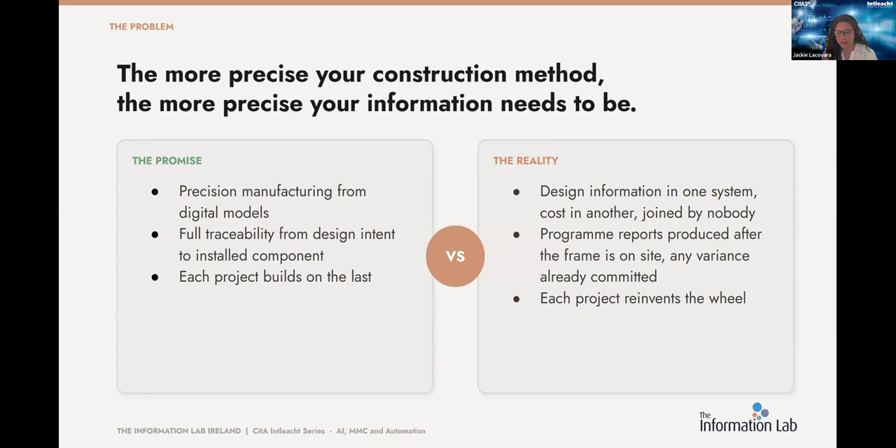AI is a multiplier, right? And that's really what I want you to take away from this slide. It takes the patterns in your data and amplifies them at speed, at scale, and with a level of confidence that can be genuinely misleading.

We've all been there. If your information is accurate and connected, the output is useful. If it isn't, and in many businesses in this industry, it isn't, well, at least not fully, you get wrong answers delivered with authority faster than any spreadsheet ever managed. And so that's really, I think, what matters for this group.

When AI informs a professional output, a cost plan, a specification, a program, the professional who acts on it also carries the accountability. Not the tool, not the platform, the person. And so the trail back to trusted information isn't a governance question, it's a liability question.

Which brings me to something that I'd like you to sit with for a moment. Really practical question, right? So, who in your organization is using AI right now and on what? We hear from senior leaders all the time that loads of folks are paying for ChatGPT themselves, or in some cases Claude, or some of the other industry leaders out there.

I mean, they're paying for it as a monthly subscription, and I get it, right? The tools are genuinely good; they're really useful. I'm not going to sit here telling people not to use AI, but at the end of the day, bid strategies, cost models, specifications going into a consumer tool with no enterprise terms, no governance, no record of what it was working from.

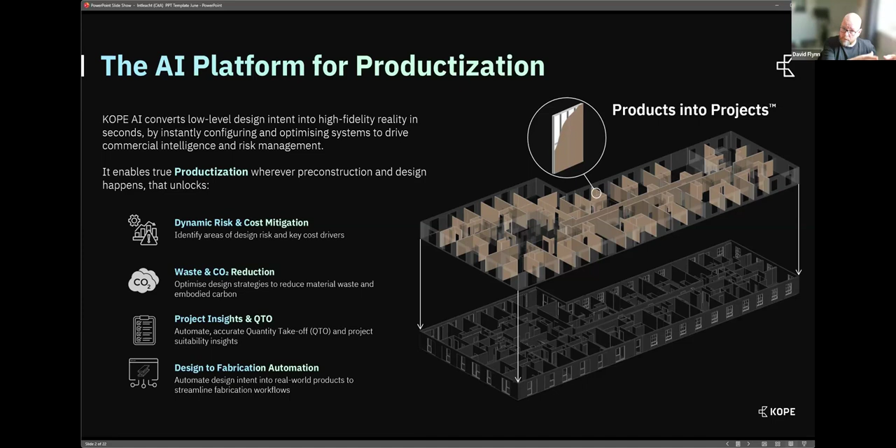So I'm not going to get into the full detail of what the platform does today, but I want to kind of give you a bit of a background on the journey from MMC focused only into AI for MMC that we've had over a few years.

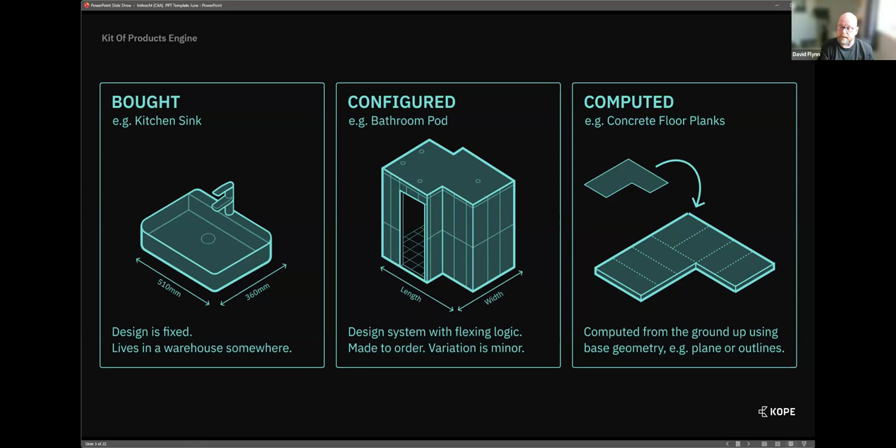So where do we start off with? Initially, when we talk about components or elements or parts or whatever language we want to use that goes into a building, we wanted to focus a bit more on the system. And we've landed on the scenario here where a lot of our customers or partners that we work alongside tend to have a huge amount of IP that goes into what their product is.

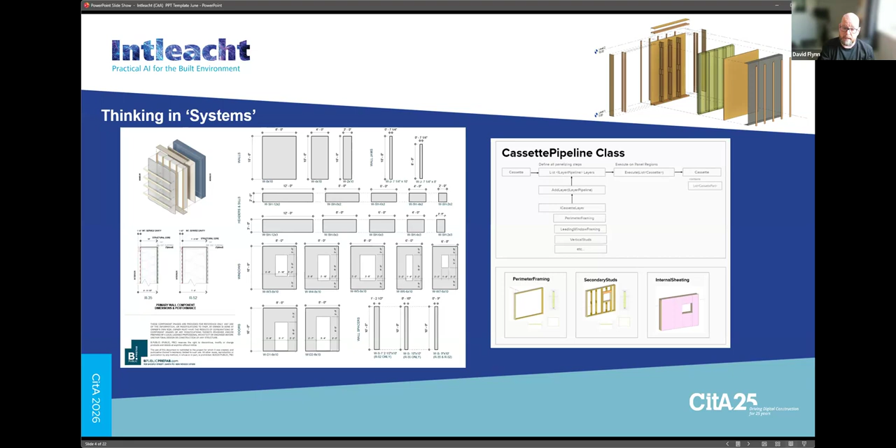Like they're manufacturers, they make a wall panel or a floor plank, and that is what they do, and they make them really effectively. But what we tried to do is to actually help them develop their catalog of products really around the idea of the context of the design. So here's some examples of some of the work that they would have provided with us, in collaboration of here's our product. And then on the right side, you can see how we're starting to think about how we would execute that in a design tool. We'll get into that in a few minutes.

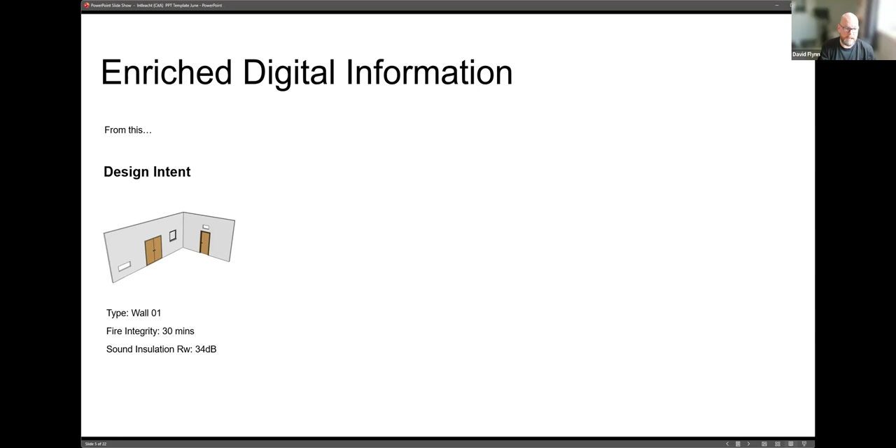So what do I actually mean? So the baseline is that we all know that design work evolves over time. We start at our early design stages, we move through into detail, and then we move into actual construction phase. And so what we try to do is to say, well, we always start with design intent. What are we trying to achieve? What's the industry trying to achieve in relation to the particular building? So you'll set out a particular spec.

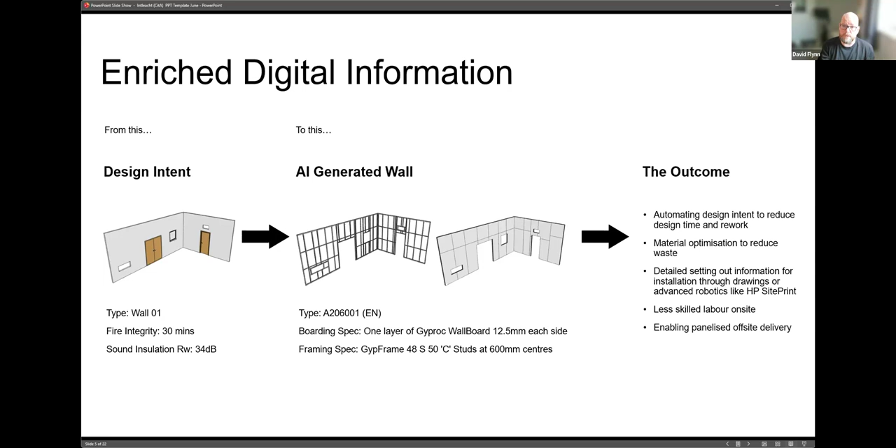And the tooling that we're now starting to evolve towards with this AI-generated approach is that we start to break it down into all of the pieces that would be required to build that element, but also then tied to the supply chain and focused around what actual boarding are we using, what actual steel framing are we using, what insulation is there, how do we open around a fire penetration, how do we open around a door, and then obviously giving us some of those outcomes, which is core to our focus in relation to being able to reduce the labor and reduce the material waste, which I'll get into in a second with an actual case study for you all today.

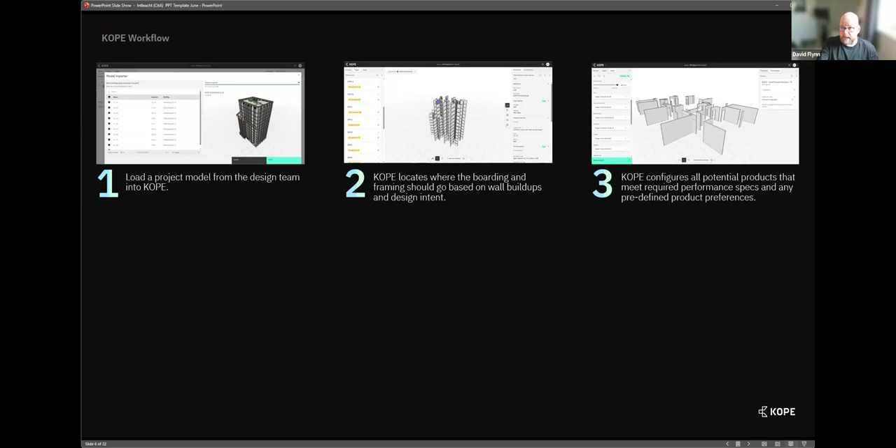So the steps that I'm showing you on screen are not really the core point today, but I just wanted to give you a feel for going from design intent, where what you'll see in the next session is really focused around being able to accelerate that with AI tools, all the way through to fabrication.

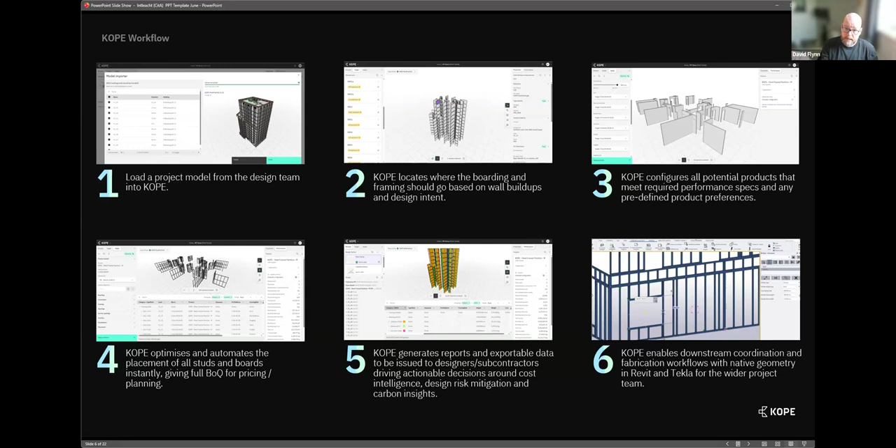And in this example, it's in Tekla for actual implementation of what's happening on the factory floor for those elements. Now, the way that this is working, and the reason we've transitioned so aggressively into the AI space, is that so much of MMC is around the rule sets inherent in a product. A piece of plasterboard is nearly always 1200 mil, they come in particular lengths and depths, and perform in a certain way. There's a really rigid set of rules that we're able to leverage and utilize.

So what I want to encourage people to think about when we move into these AI toolings is that while these tools hallucinate regularly and can make a lot of errors, the infrastructure of what you're actually providing in the first place is where you can really capture the value. It's aligned to what Jackie said earlier on. If you can understand what the product is actually supposed to do, and all the things that will go into your design, you've already solved many of your issues.

So what's on screen is just an example of us looking at simple panelization of a wall. This stuff feels very normal and natural - you put a board on a wall, you overlap the boards for fire. It's not that complicated. But what the AI tool is seeing is very fixed rules - if this, then this, then this, then this. It really allows us to do quite clever things off the back of that.

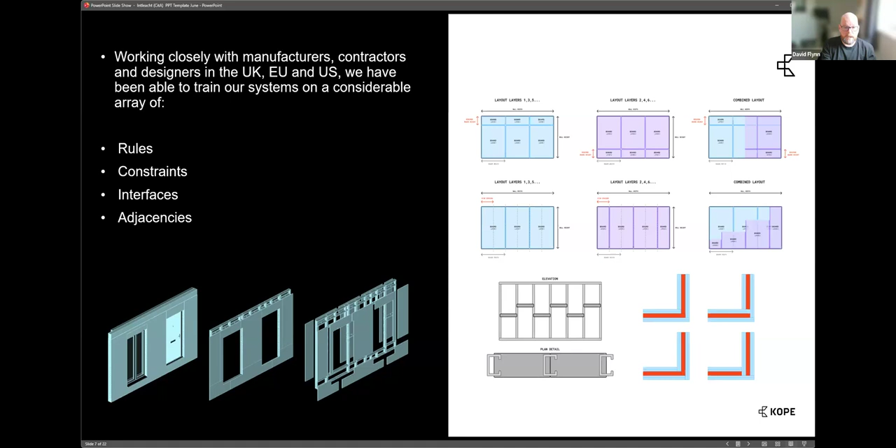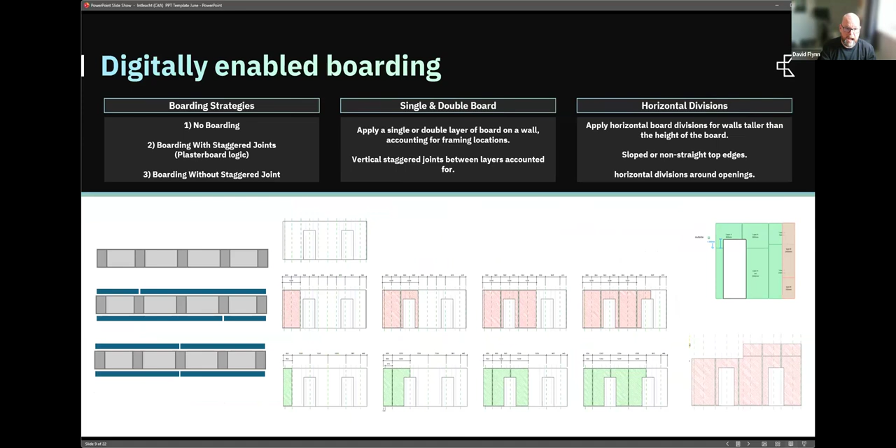So thinking about that, I've got a few slides here where we dive into a bit more detail. I won't get into this in particular, but it shows that our thinking is like, what exactly is happening in a building? What exactly is happening in relation to the transport and the installation steps? What do we need the AI to understand beyond just giving it some very generic kind of actions to follow through on?

So the core concept of what we're trying to achieve with the AI tooling that we've now brought into KOPE, and for our customers as well, is to move away from what you see on the left, which is a relatively simple design process. We are designing a floor of a home - it's got walls, doors, windows, stairs, all the usual things. But we're very much driven by the tooling that we use - Revit works in a particular way, ArchiCAD will work in a particular way.

What we're trying to achieve is actually something closer to reality that's happening on the ground. So what is actually making up that model? The example on the screen on the right is a real conversion of the one on the left, that we did for one of our very first partners - a volumetric modular company in the UK, where they wanted to break it down and actually manufacture everything themselves. They wanted to know all the OSB board, plasterboard, insulation, fixings, brackets, everything - they wanted to understand how many of them there were.

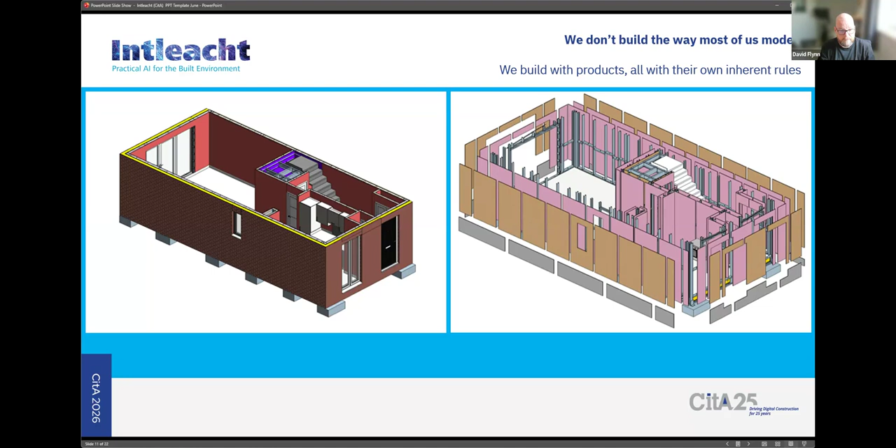So our tooling moved from the left to the right. That was long before the AI tooling came on board - things have changed aggressively, and I'll show you that near the end of this session, which is kind of exciting. This was someone clicking 20 buttons in Revit - still very fast, but it took a lot of time, and it produced a lot of information that wasn't particularly needed. I'll show you where this kind of landed as we go forward.

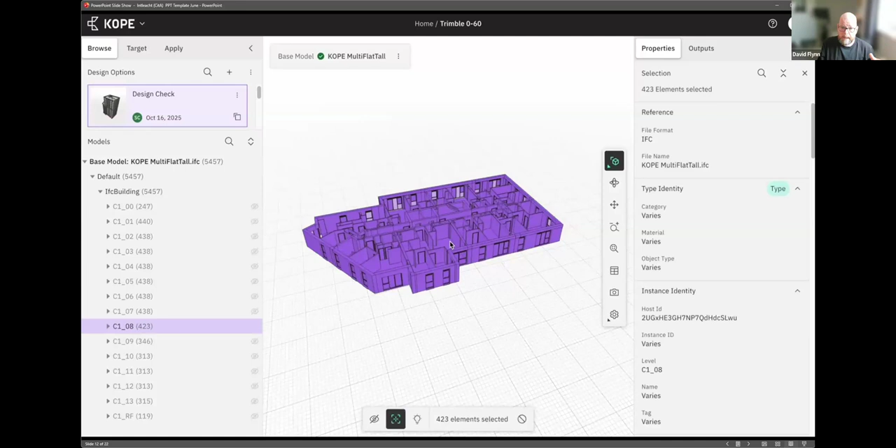So just to show you KOPE in general, this is an example of what we're trying to achieve with a standard design. You're bringing the design into the tool - here we're just going to isolate a single floor. What we're trying to focus on is what we actually need to put into this building to build it. You can see on the left we're focused on the external walls and internal partitions, and the tool's just finding the spec - it's basically saying you're an internal wall, you've got a 60-minute or 30-minute rating, you're an SFS system on the facade. And what it's done is start to create all the framing for those elements.

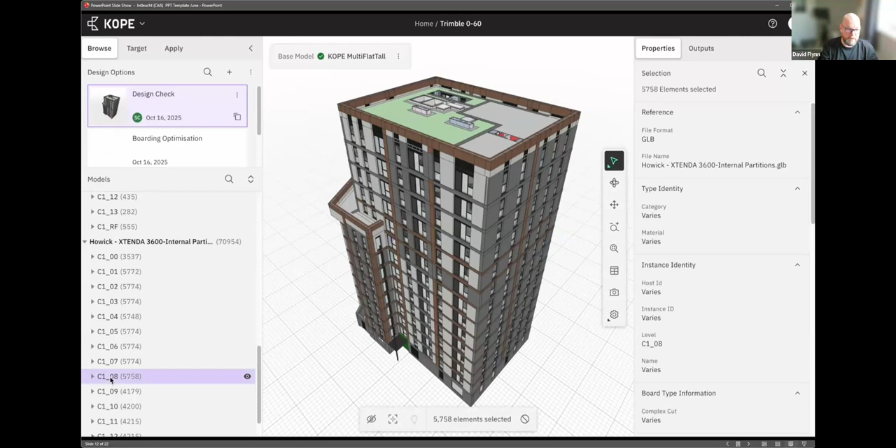So you can see the framing on the outside. As I turn off the background file in a second, it should disappear. And we should see then all of the wall panels that we placed.

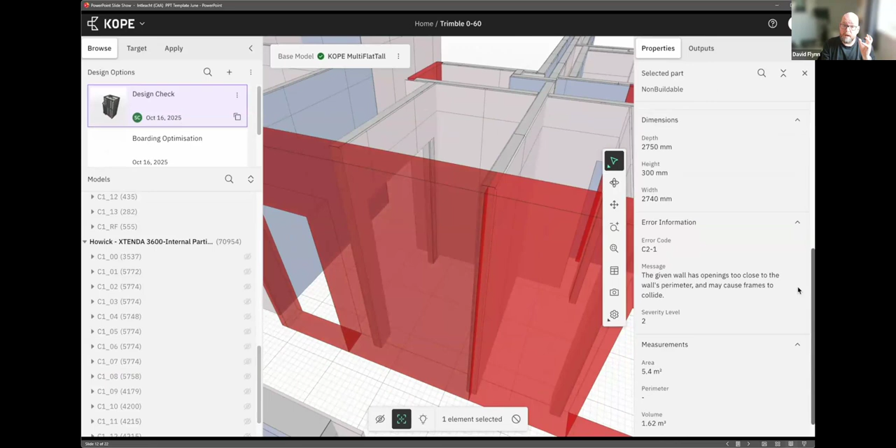Now, what I want to get across here is that this is not just breaking things down. Where the AI and MMC ideas come together really, really profoundly is what we're focused on here. This red element is actually saying, I don't think your system would work here. There's a bit of an issue in the way that the door opening, as an example, is in the wall. It's telling me that certain issues really need to be resolved in the design step before KOPE is going to run all of those different systems.

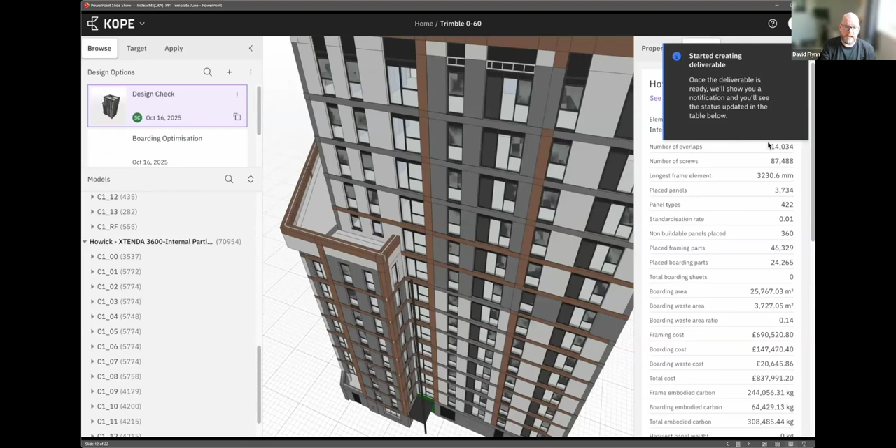So you can see all the metrics that we're getting at, which is typical for this type of tooling. But the real core focus there is to say what can be built and what can't be built at speed within the file.

Now, that's just a quick overview of the tool. I'm not going to get into it too much because what I really want to show you is later on, but I just wanted to give you a feel for what happens when you do this practically. So the numbers I want you to focus on are at the very bottom left of this screen: we've got 29 ton and 20.68%.

Now, that was what they were expecting to have in this particular building in London through the work we've done. Now, after we'd run the process and actually delivered the work within this building in London, we were seeing a halving of material waste. That would have been incredibly difficult for a person to do.

So what we were basically saying is, these are the constraints of the material. These are the things that the material can and can't do. It doesn't like to be here. It likes to be here. Let the tool run and run and run, and it will find a scenario that is both buildable and cost effective and reduces the carbon impact on the building.

So this is just focused on the internal partitions for that one scheme, but I'll show you where we're heading towards in the future.

So if you can bring these two things together, MMC with its rules, its understanding of complex situations, the way that rules should work, coupled with the AI tooling that we now have, it's a hell of a combo to bring together.

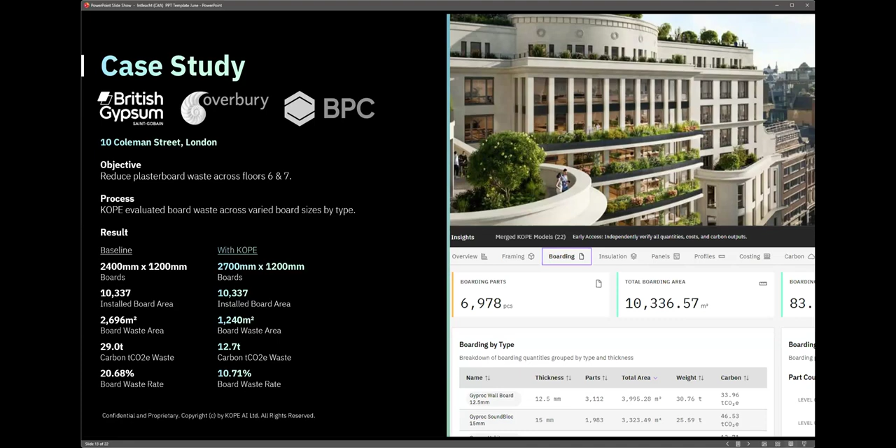Now, beyond that, what I wanted to get into is something where we've landed in the last 6 to 8 months. I don't know if anyone on the session has had this impact on their business, but since October last year, the tooling essentially has become as good as a developer. We're able to basically tell the things, and it's able to supplement our team in a very, very impressive way.

And what it's really changed for us is the idea that we don't want to just make the tool a bit better. We don't want to improve certain aspects of it. We don't want a better mousetrap. What we actually want to be focused on is actual systematic transformation of the way that we're working. So can we do things that we couldn't have done before, as opposed to doing some things a little bit better? So kind of changing the dynamic of those two.

And to give you a feel for where we were in, let's say, October, November of last year, these were the 5 categories of things that we were able to configure. We can put these directly into a design off the bat, not a problem. All of them fully operational and working on real schemes.

But what we then did is said, look guys, we have really, really impressive AI tools out there at the moment, but we're unsure how to utilize them. So we ran a hackathon in the team, and we basically said, we want you to advance that list of categories. So if I just go back to that, I want you to fill the blank space on that slide. And we have 2 days to do it.

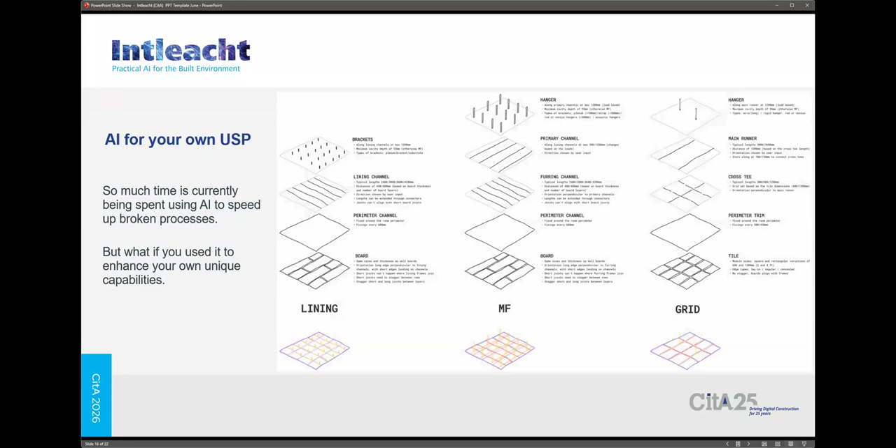So what we wanted to do is take our understanding of how many MMC systems and traditional construction products work, and feed all of that information into the AI platform we've built in-house, then start utilizing it directly. As an example, how can we do ceilings, and how can we do multiple types of ceilings? This is very recent and sketchy, but we're now able to build ceilings without having to do any extra work, just placing all that geometry based on the initial research we did.

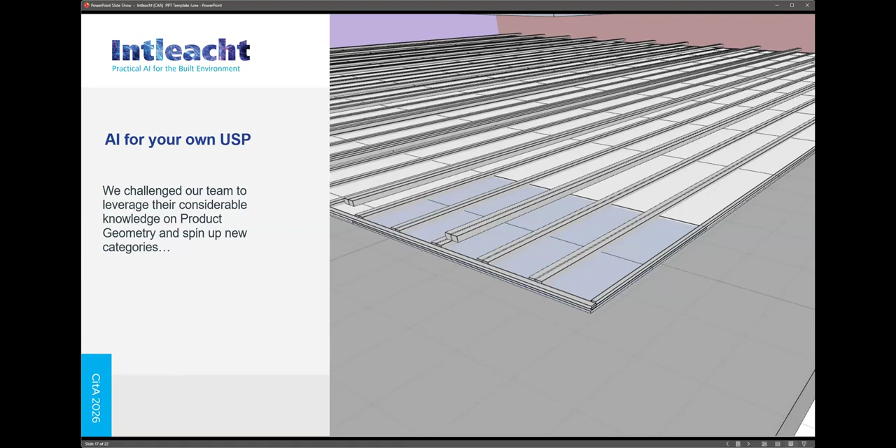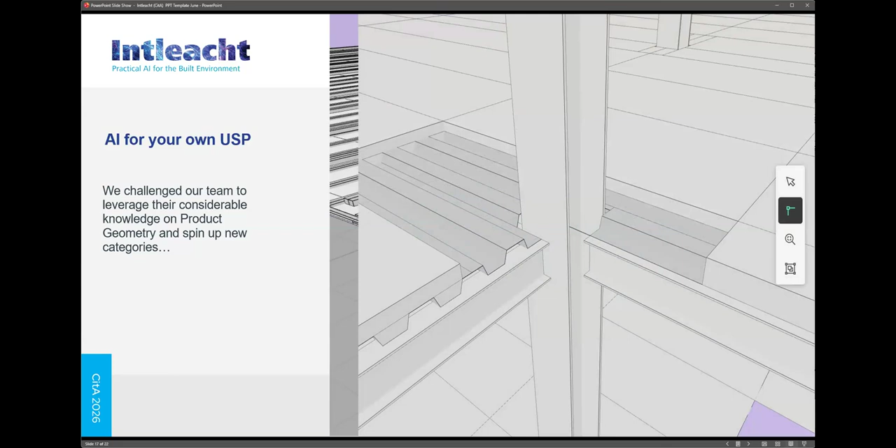That was also coupled with primary framing and composite deck, all relating to each other. The AI understood that you've got to cut your systems back, and you've got to have fixing details here. So obviously very embryonic, early days, but it's allowed us to go from taking 2 years to do a product category down to probably 2 or 3 months, which is very exciting.

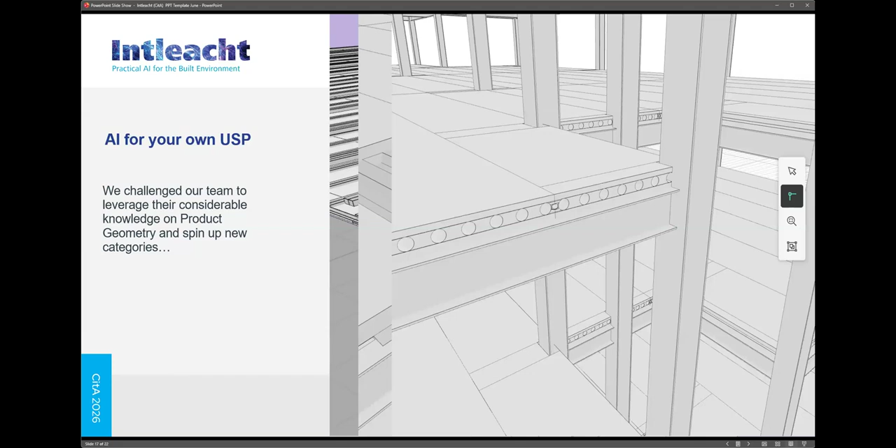And that's then expanded into other categories that we're focused on with contractors here in the UK. What that allows us to do is really ramp up all the things we can work on.

So one of the things we've learned, probably the hard way, is that you can use these tools in anger and get decent outcomes. But if you don't align them to your own company vision, your own process, and your own aspirations, they tend to steer you awry. So what we've focused on here is being a very competent product configurator that's hyper focused on expanding that capability, as opposed to streamlining other things that might have value but aren't core to the USP of the business.

Now I'm going to wrap this session up with something relatively new, and I wanted to articulate what this is before showing the video, because it's an interesting one. There'll be many Revit users on the call, and there are web-based tools coming through at the moment, one of which is called Qonic. It works similarly to Revit, you can design your 3D BIM models in there and elaborate on your designs in a really effective way. We did a collaboration with them, and I wanted to show you the outcome.

So what I'm going to show here is completely autonomous. There are 3 main aspects to this.

The first one is what we call headless. The best way to think about this is that if you opened up Revit, or Forma, or Tekla, any of these different design tools, all the capabilities of another tool would automatically work. You don't have to do anything, there's no installing, no connecting, no API, none of the messing around you'd normally need to do. It's just a simple attachment within that tool that lets you see all that product configuration happening live within the model.

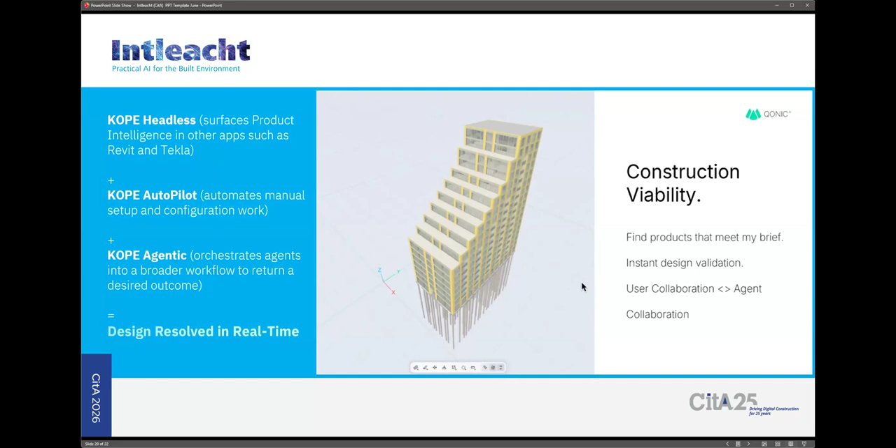And the last piece of this is the agentic piece, which you'll hear about in the next session, which is really about allowing the tools to go off and do things on their own. I'll show you this video, hopefully it runs okay, I've slowed it down a little bit. So what we've got here is the agent on the right side, and what it's doing is finding the walls it wants to work on.

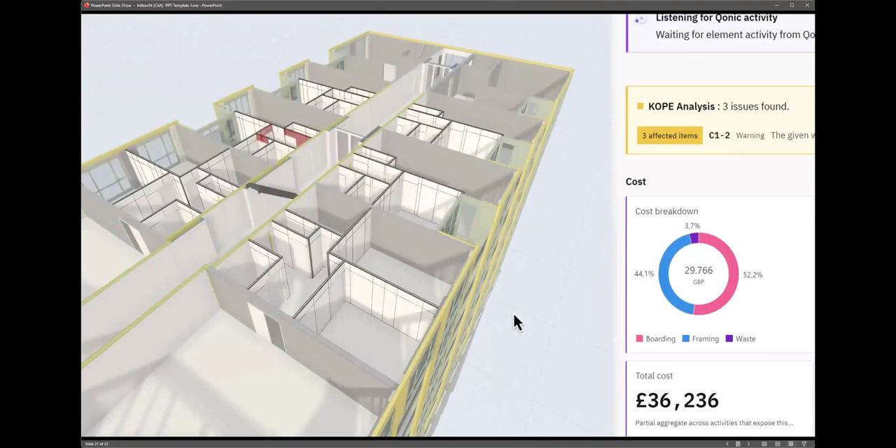So it started to run. And what it's done is it's found the walls and automatically placed all the boarding, all the studs into all of those walls, and it's given us the metrics you see on the right side.

So it's given me a review. It's also found a couple of walls that it doesn't like. It's saying you're not actually going to be able to build this wall. A great example is that door's in the wrong place.

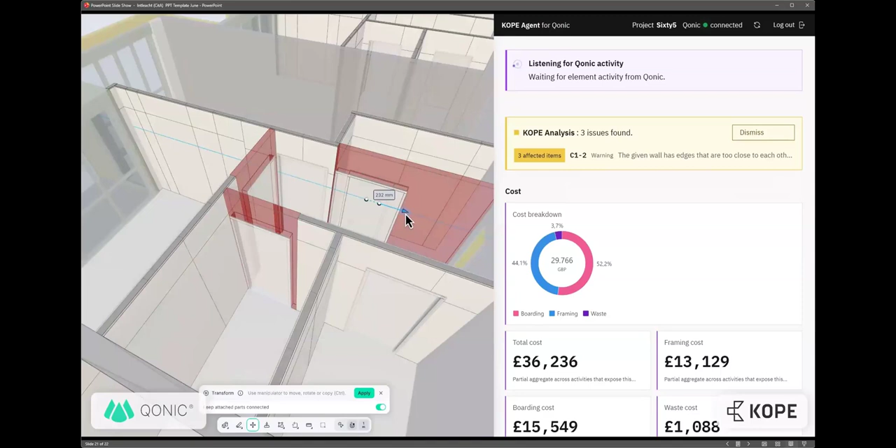So the architect is going to go back in there and move that door, and instantly it's completely reframed. It's also found its partner wall and reframed that wall too.

So this is nothing to do with us. We're completely removed from the process. It's just running our logic.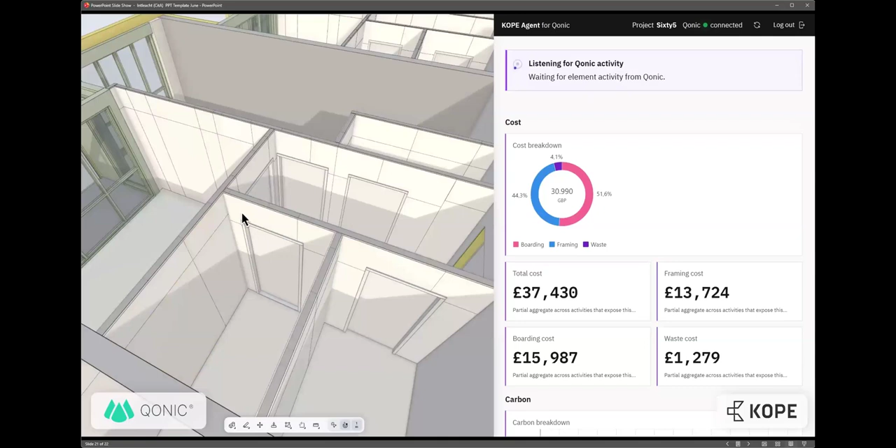Again, the designer is going to move that door and it's going to refresh the walls associated to that. You can see at the top right corner it's listening for activity, waiting for you to do something, and it's automatically fixing the problem right behind the steps you make.

So really a key ability for us is to bridge the really high speed abilities we have in the AI world with real products, real things from the supply chain, whether from a British Gypsum or a Saint-Gobain, whether a precast concrete system or whatever it happens to be. All of that was automatically placed directly in the model, automatically from the AI system.

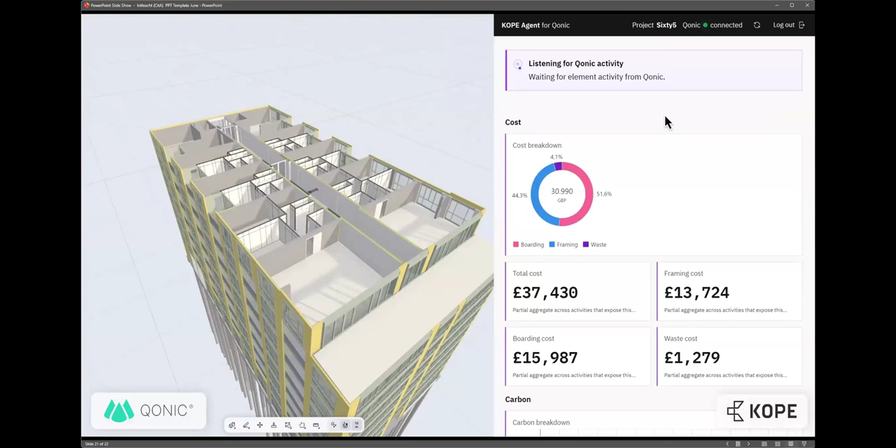Now I'll just wrap up with a simple thing, because you can see the metrics we're getting as we run, but that's kind of par for the course. What I wanted to get across is what's the journey and where do we think we're heading? My background is in architecture and BIM management, so I'm very familiar with this.

Apologies, I didn't put my RIBA stages up here, but the RIBA Plan of Work lays out how we move through design, moving from something incredibly strategic and relatively vague to things that are real and tangible at the end.

We see these tools coming together with pre-manufactured or MMC processes and AI coming together to allow us to do something that really compresses this down into a very condensed, very high speed world.

So generative optioneering, being able to test ideas very quickly as you just saw in the video, understand how a product would work, then linking that directly to the supply chain and having instant productization directly in the file, and then having all of that information essentially create a digital twin because you're actually putting products into the file.

So a really exciting new world that we're hopefully moving towards. It's going to be interesting how we all interact with that, going from generative optioneering all the way through to automated assembly in the build.

So the next session will really give a bit more grounding to what I've discussed here. But like, I just wanted to kind of...

Páraic, are you ready? Yeah, all good. I'll kind of skim through my presentation. Perfect. Yeah, awesome.

Apologies for that too, guys. I'm based in Sydney, so it's been a little bit difficult.

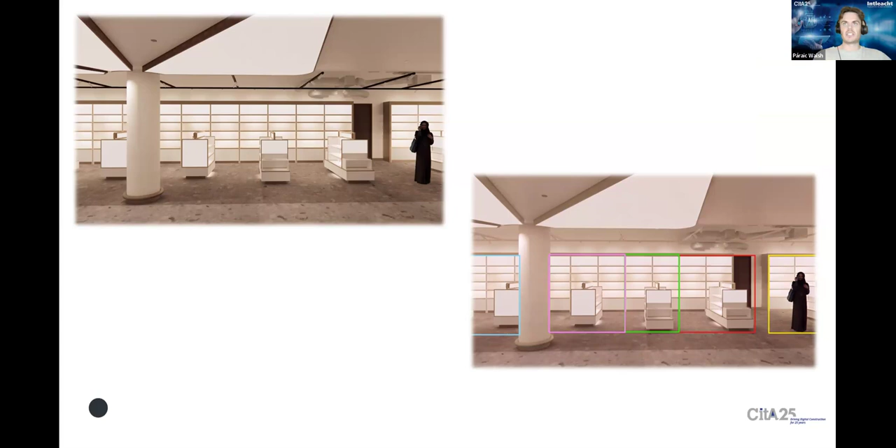So you can see the speed. So that was created in minutes. The team had about 20 renders to do for the airport in that instance. So they blew through this piece of work. There are limitations, obviously. Control is a hard one, and because it's AI generated, it is fictional.

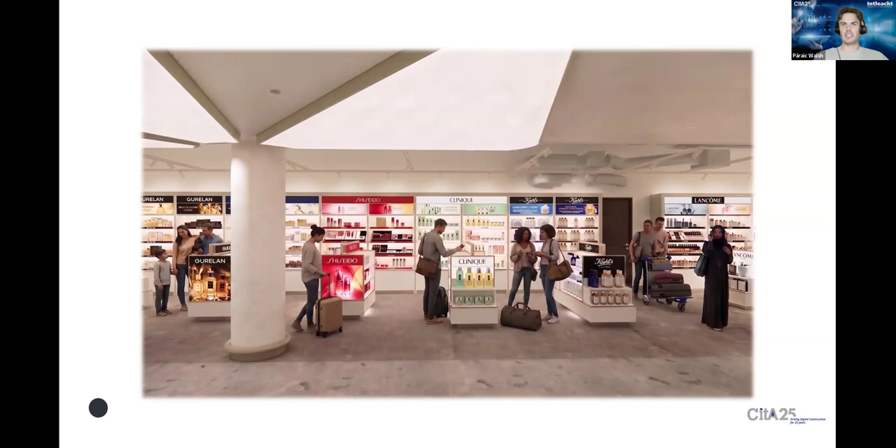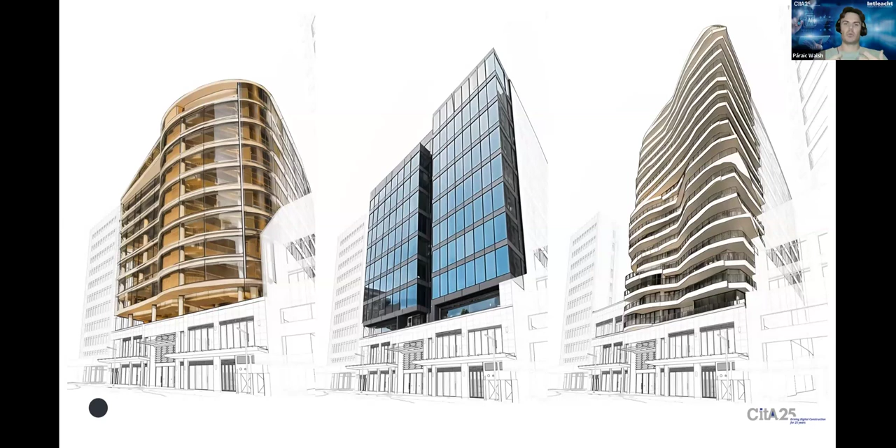Some facade remediation here in Sydney CBD, so we're testing materials and facade treatments. There were some of the facade types there on the right, so we could do quick iterations. Obviously, highly conceptual, but the speed of this is we could sit in the room with the client and actually go through and get a look and feel and sketch through it and leverage AI and really get into what they wanted and what we wanted. So it's just opening up a lot of possibilities.

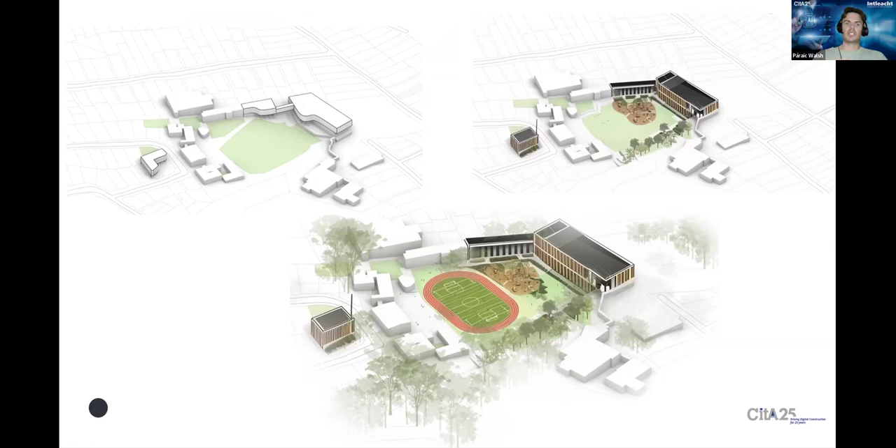The speed, iterations. A Rhino model here in the top left, where we're prompting for a master planning and landscape concept. This was a particular project where we're stuck for time. We had to get a request for tender in, so we're leveraging AI to speed up the process there.

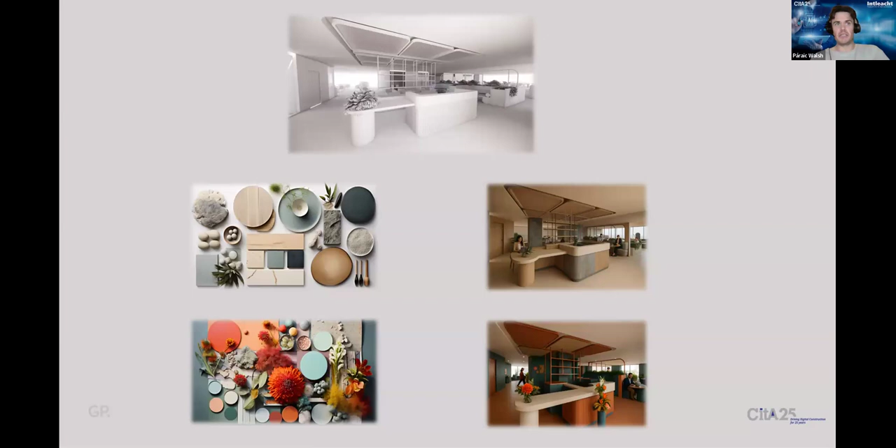And then our interior team also leveraged AI using mood boards, so it's super quick for that kind of use case. So what's next? I'd like to finish with some of the areas we're currently exploring in Gray Puksand. These are fresh off the press. We're using these right now. It's part of the R&D, research and development, in the company. So we're currently working through these.

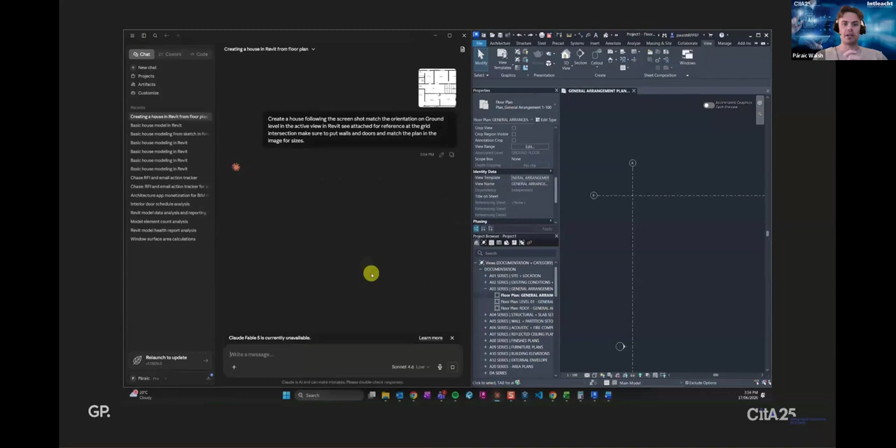So Revit remains our primary design and delivery platform. So naturally, we've been exploring how AI can be integrated directly into that environment. So here we're testing Revit via an MCP, Model Context Protocol, allowing the model to understand project concept and generate content from simple text prompts.

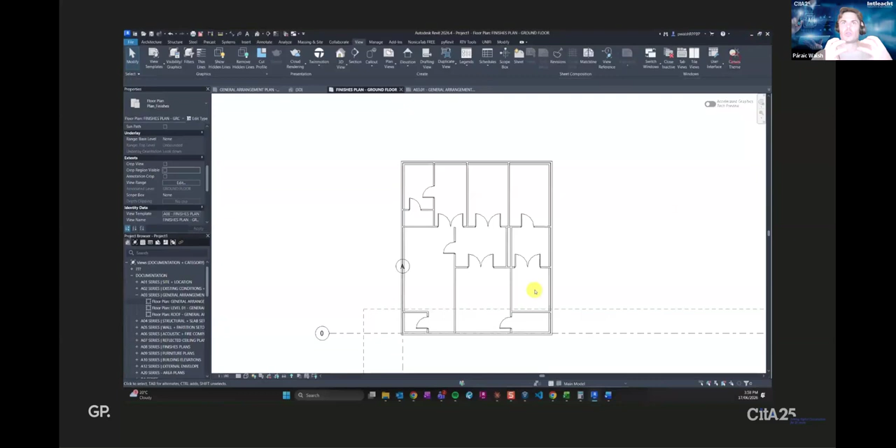So it is still early days, but what I'm doing in this example is putting in a screen grab of a floor plan, feeding it into Claude, and via that model context protocol, it's drafting up and creating that floor plan, with doors and walls in it. It's by no means perfect, but given the speed this is evolving, it's something to look out for.

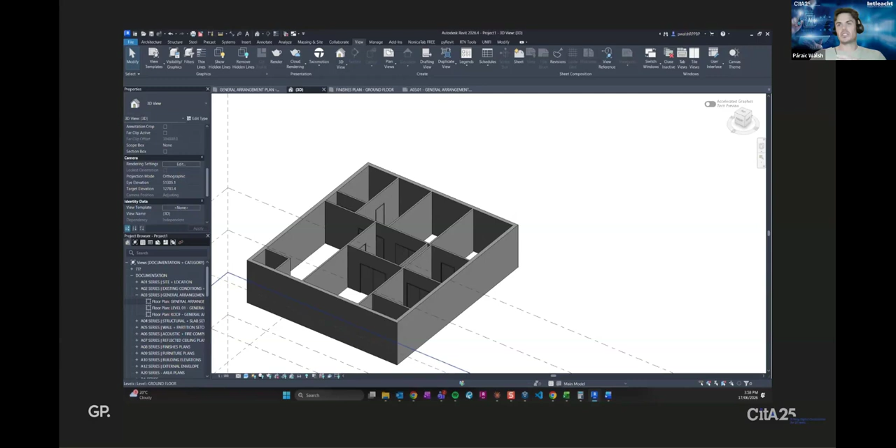Our longer term strategy is to integrate this Claude environment into Grace. So Grace is our one-stop shop for AI within the practice. We don't want to be creating a siloed effect where you have multiple models and different platforms, because you don't get as much usage. So we want Grace, that's your AI app or web-based browser. Do you want to use it in Revit? Do you want to use it in X, Y, and Z platforms?